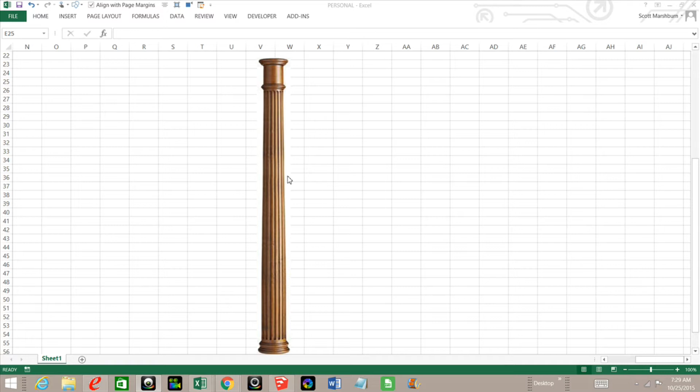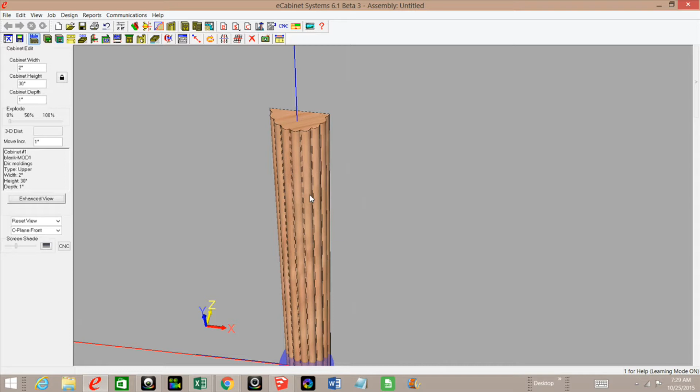The other day I had a question from one of my viewers. Keith asked me if I've ever drawn a column similar to this one right here. Well, actually, I have not. I did tell him that I have actually drawn a beaded, half-round column that was straight. He wanted to know if I had a video on how I did that one. Well, I didn't have a video, but now I do. Here's the actual column right here, and this is 2 inches wide by 1 inch deep. I have not ever got around to putting a base on this or a top, so if anyone has any suggestions they would like to see, post it in the comment section below and I'll be more than glad to see what I can come up with. But for now, let me show you how I made this.

This is an actual back off of a cabinet, and I told it to use a 1 inch thick sheet stock material, and I've got it set to be 2 inches wide by 1 inch deep and 30 inches high. What I had to do was create a cutter to get this profile on here. Let me show you how I done that.

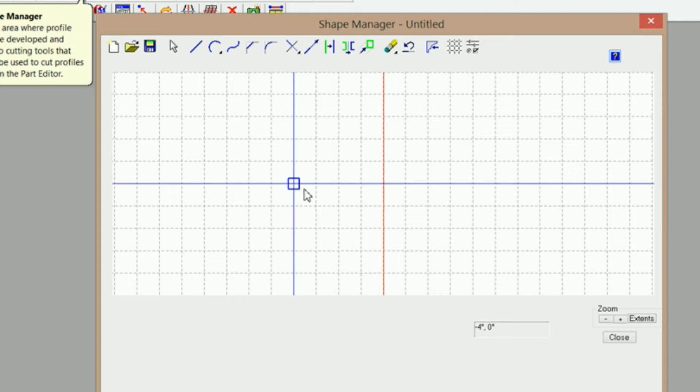I'm going to go into the shape manager here, and I'm going to make sure I've got snap on, and what I've got is I got my grid settings set to 1 inch and my snap set to 1 inch. I'm just going to draw a quick rectangle that is 2 inches by 1 inch.

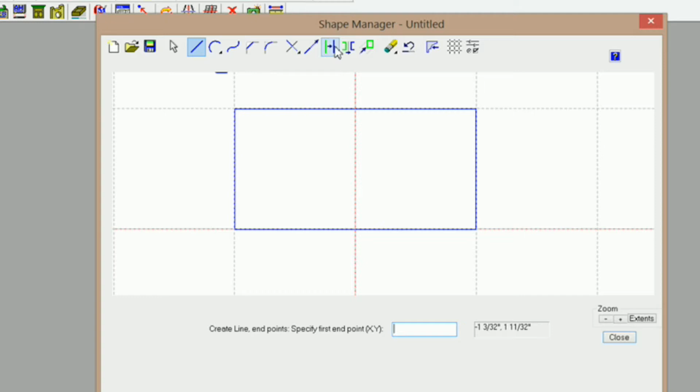What I'm going to do next is turn snap off. I want this cutter to actually be about an 1/8 inch wider and an 1/8 inch higher than what I need, but I'm going to keep this rectangle in here for now. I'm going to offset these lines by 1/8 inch. So offset that one and that one and that one.

Now I'm not actually going to need this bottom line right here, so I'm going to delete it. I'm going to go ahead and extend these and trim them. So trim 2 entities.

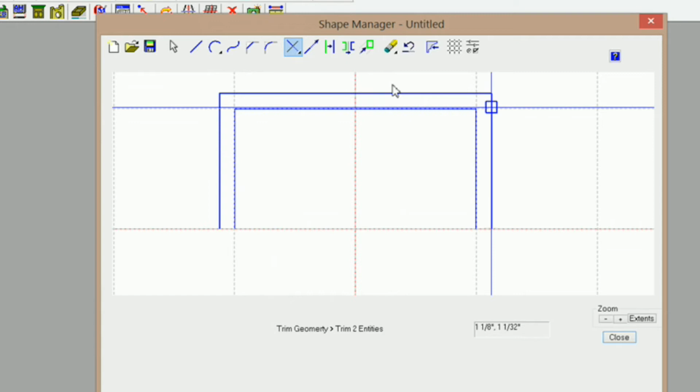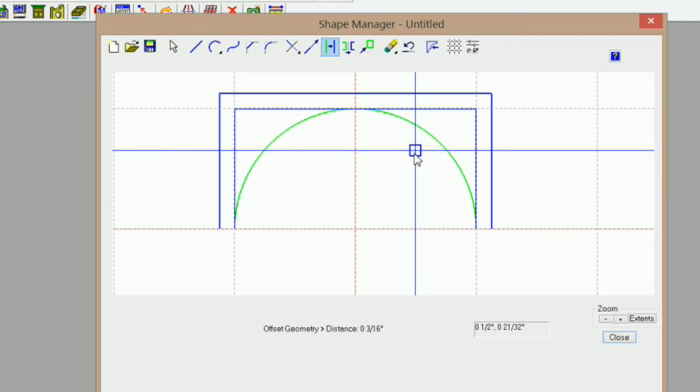Now I'm going to turn snap back on and make an arc, 3-point arc. I'll click on that line, that one, and that one. Now I need to offset that by the radius that I want my beads to be, and that's 3/16. So I'm going to offset, and I want to actually move it 3/16 of an inch in that direction there. Now I'm done with these, so I can delete them.

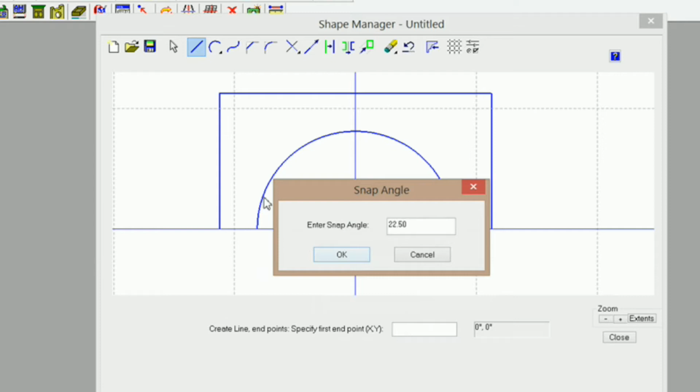What I need next is a series of lines that I can use as guides to position some circles that I want to put on here. So I'm going to turn snap back on for now. I'm going to start my line right here. First thing I want to do is angle snap here. Okay, I'm going to turn angle snap back on, and I've got it set to be 22.5 degrees. So I'll create my first line right there, and I'm going to turn snap off.

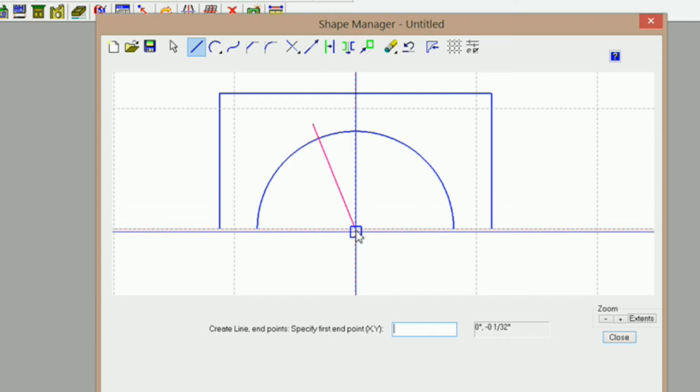I'm going to create another line from this point right here. I have object snap on, so it's going to snap to that line right there. And I'm going to come up to here and just let it snap to 22.5. So I'm going to draw my next line. Just let it go over. And I'm going to keep doing that till I get all the way across to the very bottom.

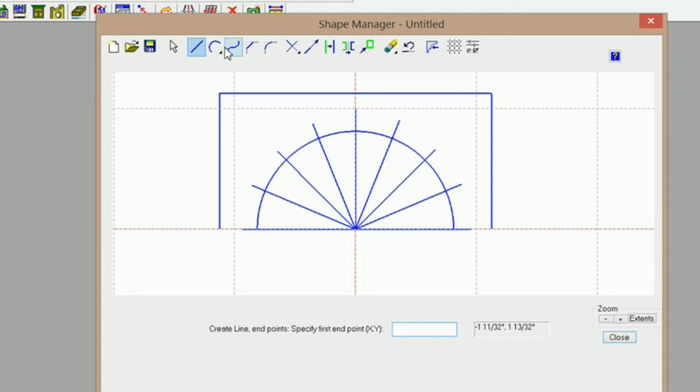Right there, I'm going to come back up here and start again. Notice how I've got my lines past that arc there. We're going to trim those in just a minute. What I'm going to do is trim one entity, and I'm going to trim this line to that arc. Now I can get rid of my arc, I don't need it anymore.

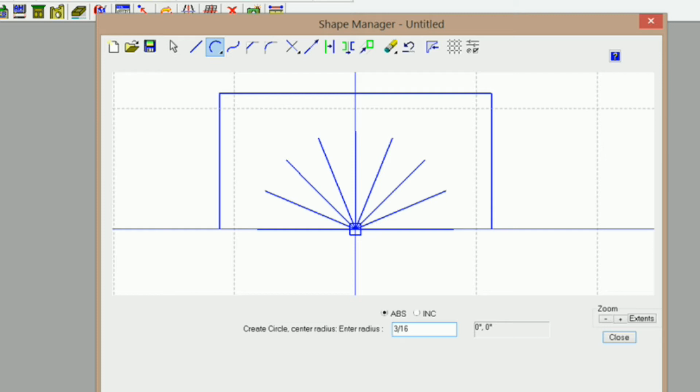And start putting my circles in here. I'm going to go ahead and turn snap back on. I'm going to create a circle, and I'm going to snap it right there in the center, and I'm going to tell it to have a 3/16 radius. And there's that circle.

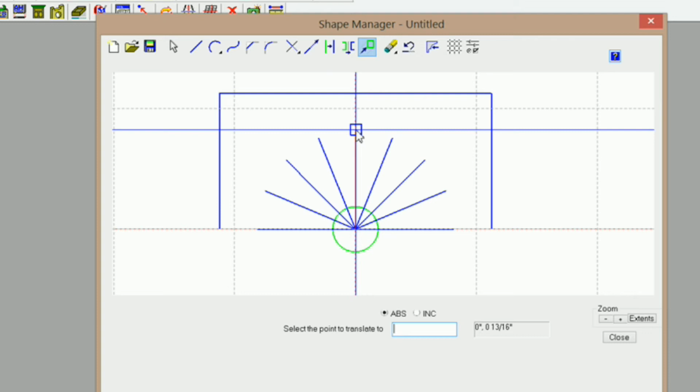So I'm going to turn snap off and make sure I've got object snap on, and I'm going to go ahead and just select single. I'm going to select my circle, and I'm going to move. I want to copy, and OK, and I'm going to make sure that it's asking for enter the point to translate from, and I want to go from 0,0 and enter. And it wants to know where to go to, and I want to go to the end of this line, and since I have object snap turned on, it should snap to the end of that line right there. I'm going to hit escape and select my circle again, and I'm just going to repeat this process for each of those lines.

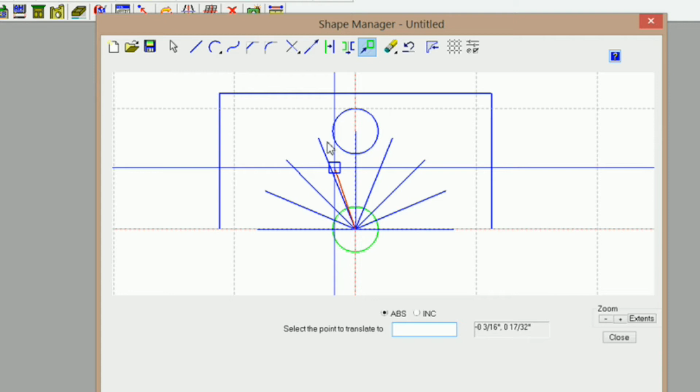Click on move, make sure I've got copy selected, 0, 0, enter, and go to that next line. I'm going to do this for all these lines, and then I'll be right back to finish this up.

Now I'm done with this circle, so I can delete it. And I can also delete these lines. So I'm going to delete inside the intercept window and get rid of all these lines.

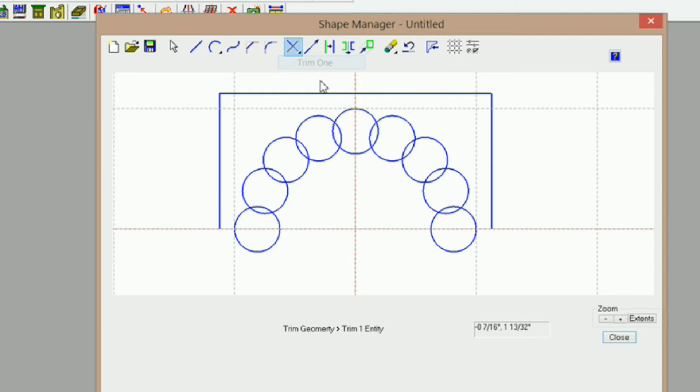Now I need to trim these. So I'm going to click on trim, and trim this one to that one, and then come right here and trim that one to that one. Just keep repeating this.

Now you can see that did something right there. Trimmed it right there, and that's fine. I'm going to go ahead and trim that one right there, and I can extend this, okay? So I'm going to extend it.

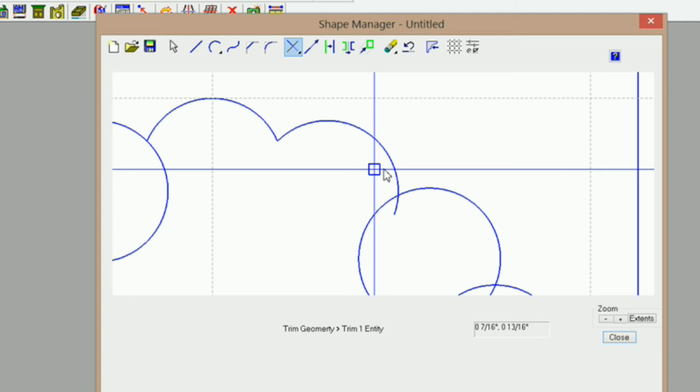I'm going to go 1/16, and trim it again. Go ahead and trim that one to there, and that one did the same thing. So I'm going to extend it till it passes through there.

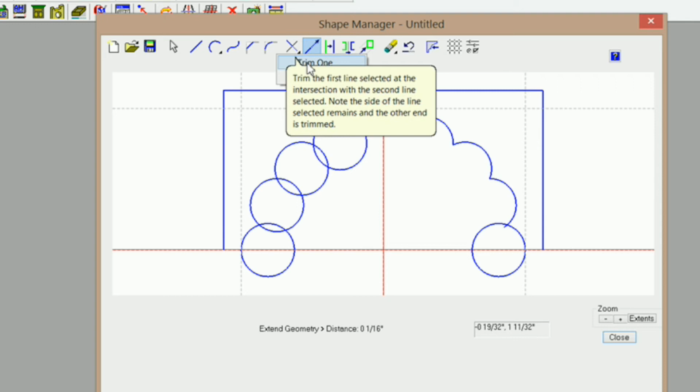Trim that one to there. That one needs to be done too. And trim. And go ahead and trim that one to right there.

Let's work on this side. And I've got this left over. I'm going to put a line right here and trim that. I'm just going to trim that line to right there and that one to right there. I need another line right here to create our closed contour.

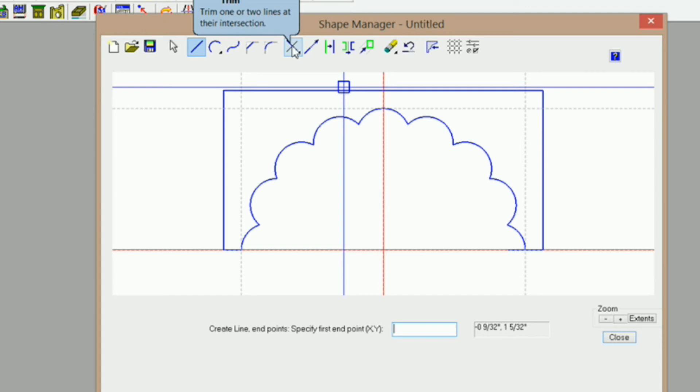And I'm going to extend this one out just in case it's not intersecting. And trim two this time. I'm going to trim you to there. And there you go. Now there's our outline of our cutter.

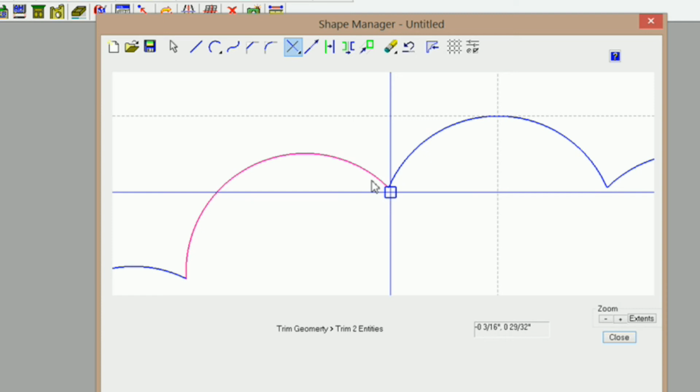What I want to do now is just put a slight fillet in here. Now if you want to leave these sharp, just tell the fillet to be 0. But I want to make sure that they are actually intersecting and we're creating a closed contour. And honestly, I think a little fillet there actually looks pretty good.

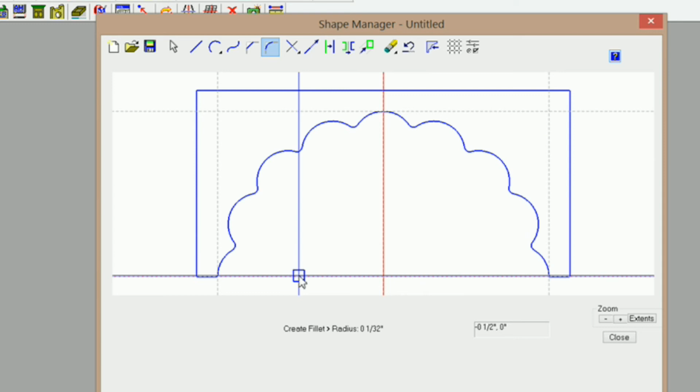So I'm going to go 1/32 and OK. And I can click on this side and that side, and there's my fillet. I'm going to go through and get all these. Now, that's our cutter. I'm going to click on my Create Tool icon, and hopefully we got a closed contour, and we do.

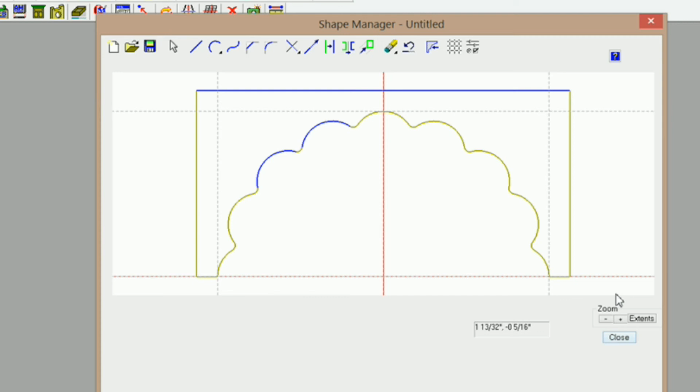So next, I can set a diameter of 2 inches if I want to, and save this in my custom tools. Now I can also save this as a DXF file. If I click close, it's going to prompt me. I've already done that, so I'm just going to say no.

And I'm going to delete the profile off of this. We can take it back into the part editor and put the profile on it. I'm going to go into the contour mode. I'm going to create edges, and I'm going to offset this line right here by 1 inch.

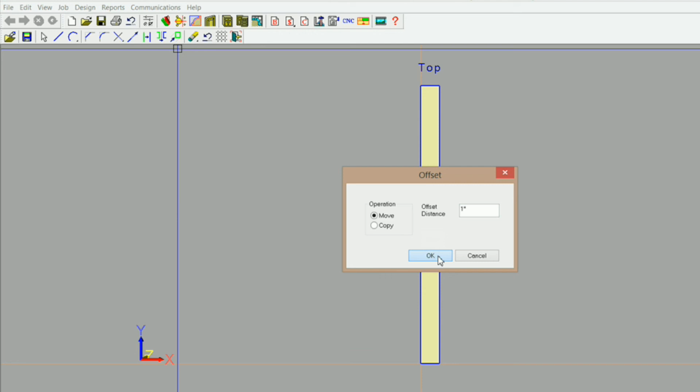Okay, we're using a center line, so I'm just going to move that line. Now I can delete the lines we do not need. Now, just for insurance purposes, I'm going to extend this line out by about 1/4 inch, just to make sure our cutter clears our part there.

Click on my profile icon there, select single, and select my line and next. Select my tool and view. Now I need to plunge that. I'm going to set that to be -1 inch, and OK.

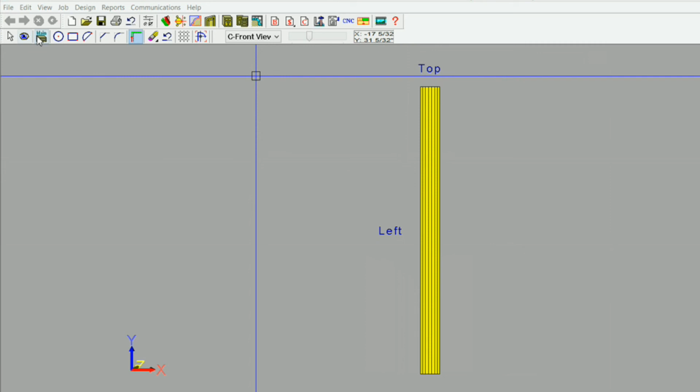So there's our column there. And let's go back to main, see what it looks like. And that's it right there.